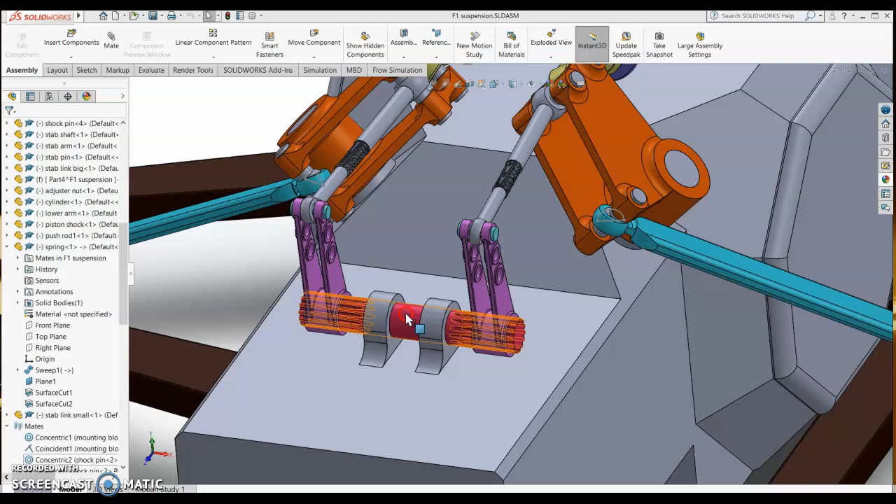On this video, we are going to review how the stabilizer shaft and arm is designed. Okay, so we open the stabilizer shaft. This is the stabilizer shaft.

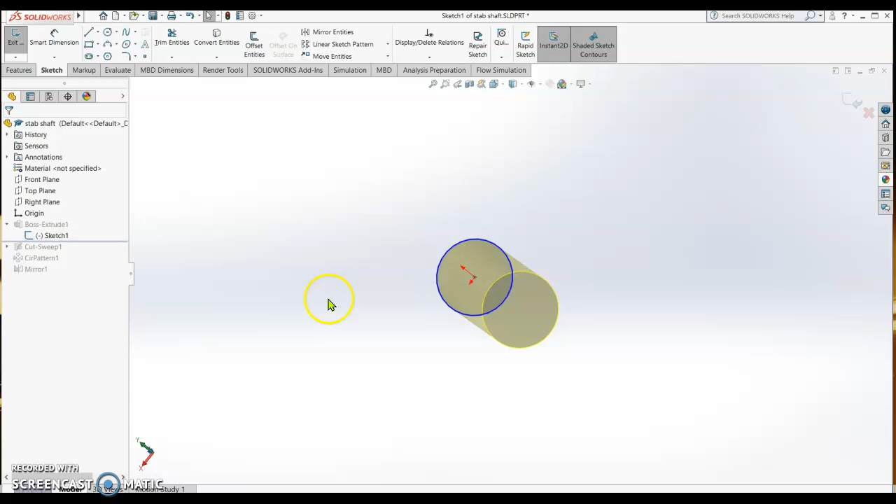There are only 4 features that have been done. We go first on the first one, which is very simple. You get the sketch, draw a circle for the diameter. Since it's not specified, we put a smart dimension of 20 mm.

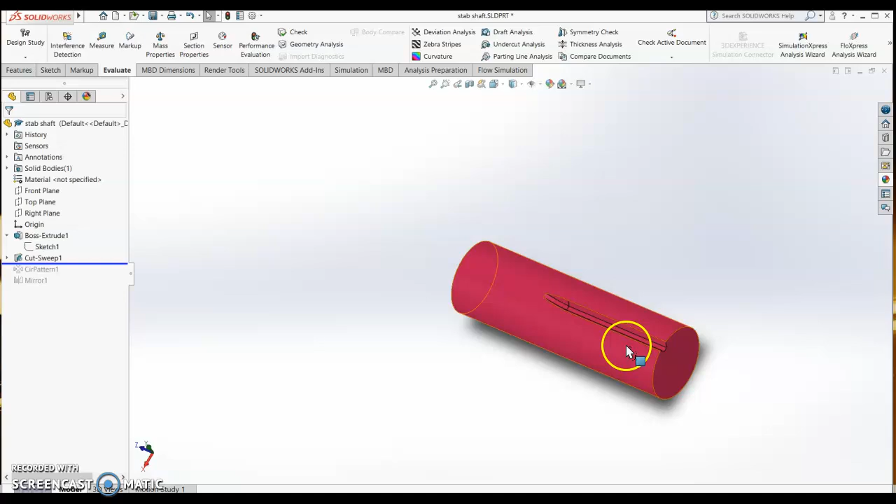After that, close, and then it is extruded boss to a length of 65 mm. So extrude boss by 65 mm. Then check, and then we cut the spline. So we cut one spline.

What is the profile of the spline? Edit sketch, so normal to. The profile of this spline is, first we drew the construction line, then draw one side which is 1.5. This is 3 mm, the total length of the line, and then we got this line, on the tip of the spline we got the distance of 1.2 mm.

There are 2, we can delete 1. So 1.2 mm, and then the height is 2 mm. The distance of this line to the point of origin is 8 mm.

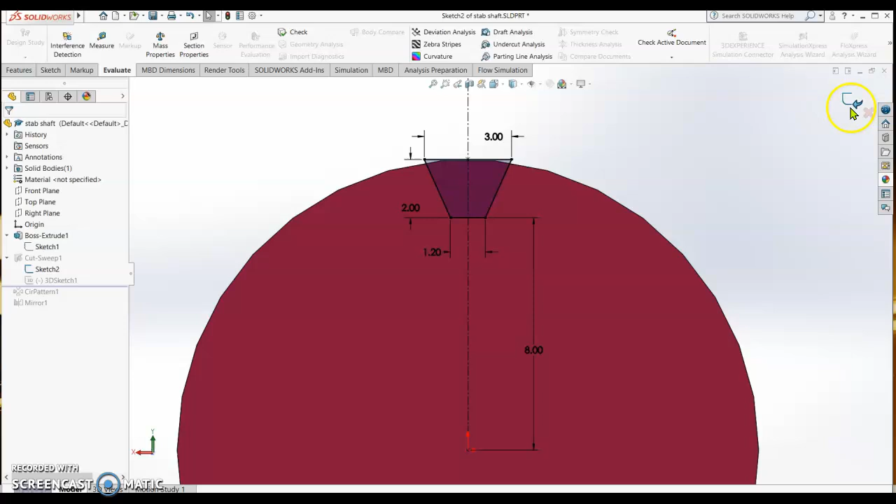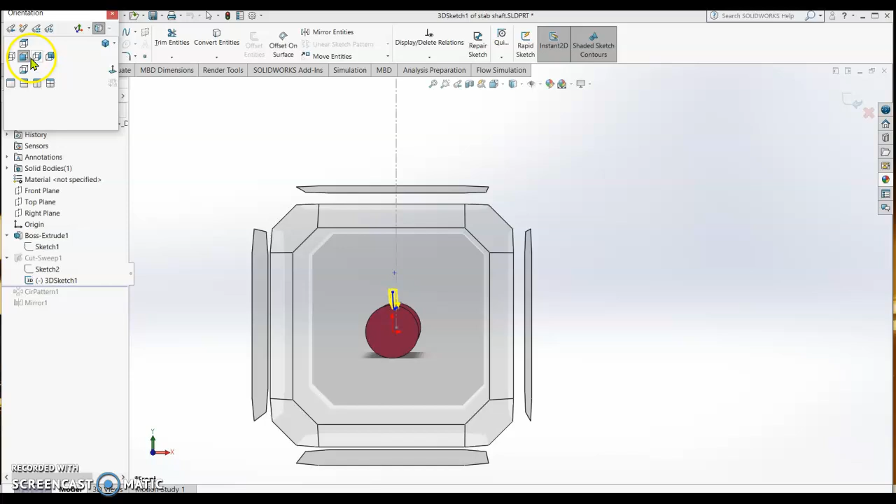Once the profile of the spline is sketched, now we draw the 3D sketch. This is the path of our sweep cut. What is being used? We go on the right side. This is the profile, sketched in 3D.

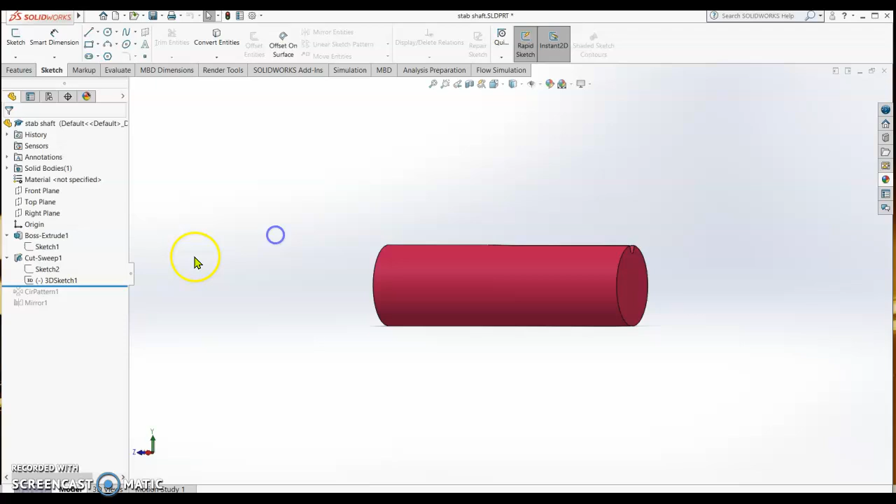After sketching, there's the profile. We close first, closing the profile. Once you sketch this profile and close it, you're going to draw a 3D sketch. To draw the 3D sketch, go to sketch, expand sketch, and click 3D sketch. Once you're in 3D sketch, it becomes like this.

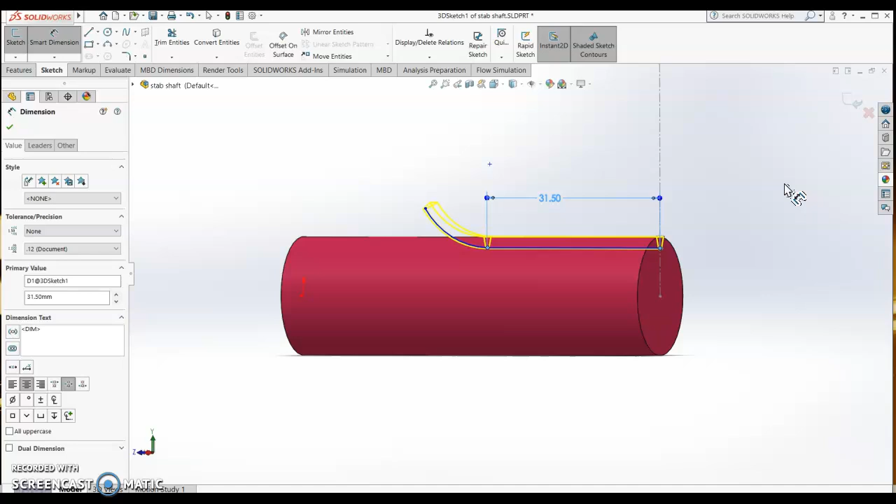This is a 3D sketch, one line going there and then an arc. For the length of the straight line, we can put a smart dimension to see the dimension. It is 31.5, so we just put 31.5, enter. Then make an arc, and close the sketch.

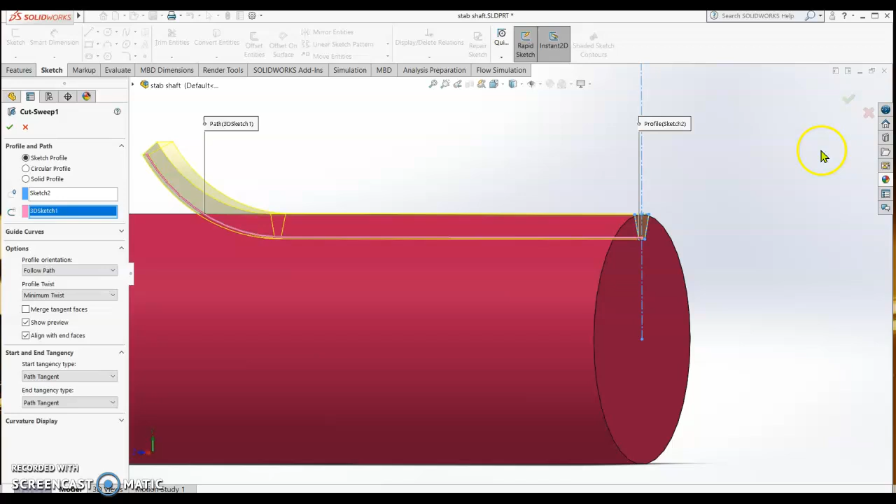When you close the sketch, you can now do a sweep cut. In sweep cut, you select sketch 2 as the sketch profile, and the 3D sketch for the path. The path is the 3D sketch, and the profile is the shape of the cut. Once done, it is cut like this.

After that we do a circular pattern. In circular pattern, how many instances? We put 14. You're going to select the edge of the shaft for your direction, select the edge, and then put 14 instances.

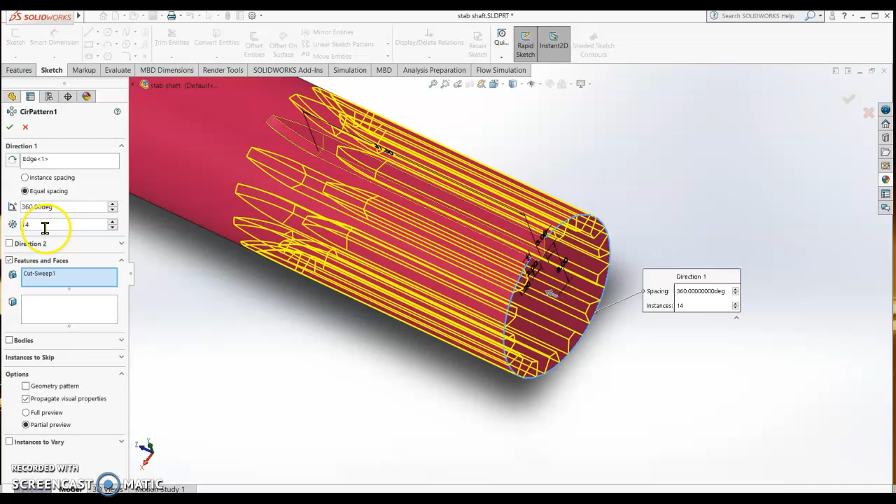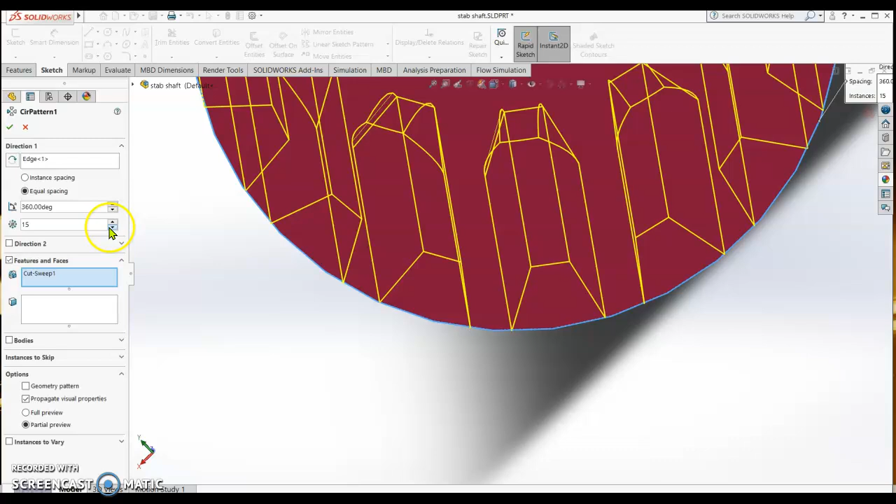It depends, because you can see here, this is your cut and this is the remaining one. If you notice that this length is the same as this width and this width, then you stop your instances. You can increase it, make it 15 or 14, so it's up to you. We put it 14, check.

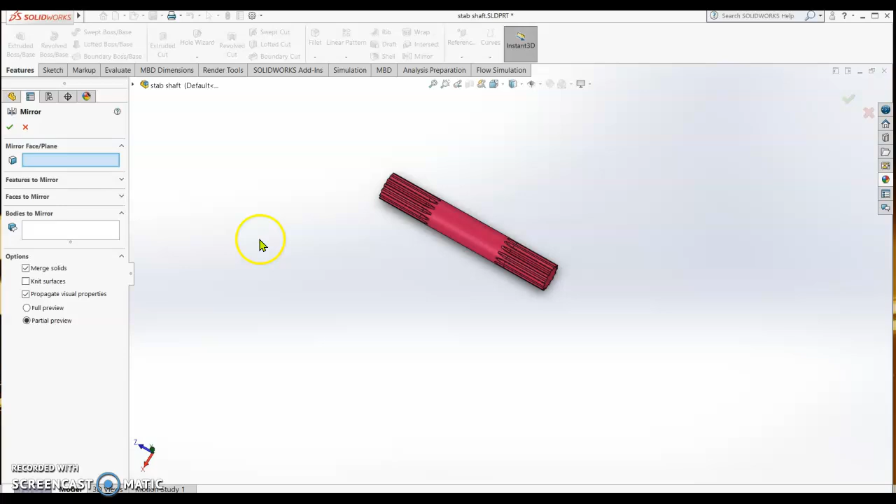Then done. After that we mirror. How to mirror? You go to features, expand, and then you have mirror. In the mirror, we are going to select the face of the shaft, which is this one. We can clear this one.

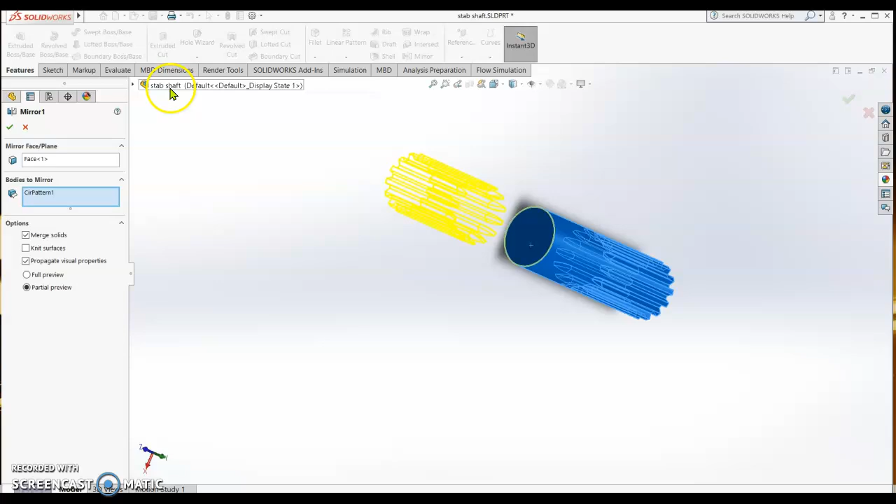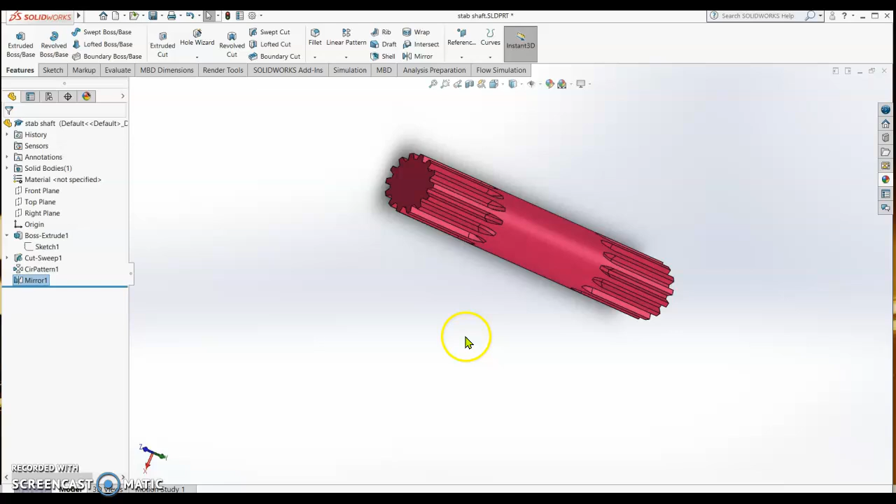Clear, you click this face, and then you click your cut. Make sure that this cut is for this bodies, and you're going to mirror the bodies, meaning selecting this entire shape, and then check. So this is now the finished product of the stabilizer shaft.